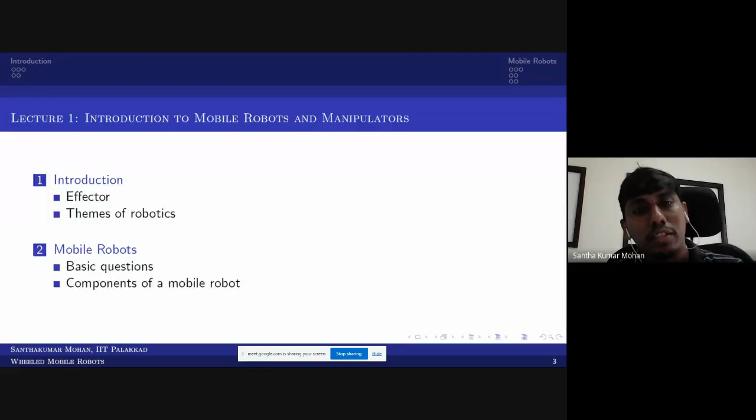What that means is, any robot or robotic device that has an effect on the environment is what I'm going to call an effector. So effector is nothing but robot or robotic device. Now you can look at it: this effect on the environment can cause, you can say, two major different motions.

So the effect on the environment causes motion of the effector itself, and that is called locomotion. For example, take a football. You are standing on top of the football and trying to roll it. What happens? The ball will roll, and if you are able to stay stable, you will also move along with the ball. So this is one case: the effect on the environment causes motion of the effector itself.

Now you are not standing on the ball, but you see the ball in front and your leg is trying to manipulate it. So based on that, you have two different classifications. One is what we cover in this course, the locomotive device: if the effect on the environment causes motion of the effector itself, we call it mobile robot. The other, if the effect causes motion of objects around, is called a manipulating device, or simply manipulator. Since manipulator usually means a mechanical means, and since it is a robot, we call it robotic manipulator.

I hope yesterday my friend Sudhir covered kinematics and dynamics of robotic manipulator, so you would have got more information about that. But I will be talking more about the mobile robot. Just to give a small idea how locomotion happens, imagine you take a wheeled mobile robot.

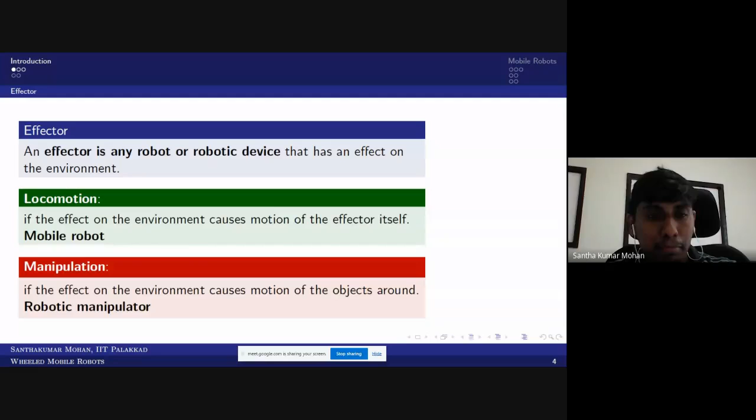One additional case I'm going to cover in the next session is called motion control, or control. What would be the role of control? Several people call the controller also one of the effectors. To a certain extent I agree, but the controller should not be called an effector, because it is actually trying to make sure the effector gives the desired effect on the environment. So the controller is an aiding tool, not an effector. In that sense, the robot itself can be called the effector - the locomotive device and the controller together are included as a single entity called effector. That's the trade-off I want to maintain here.

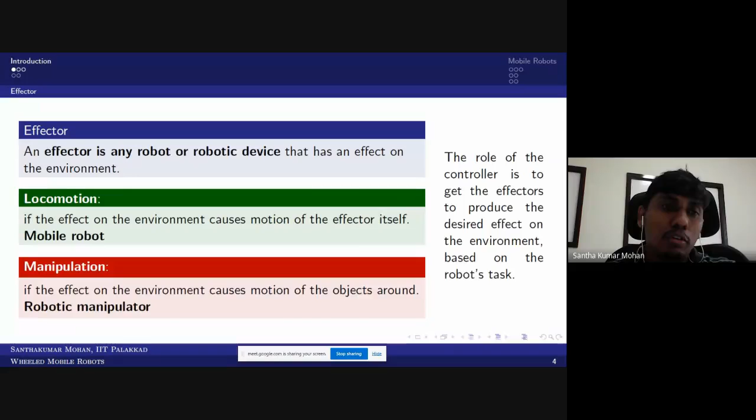Let us go further. You already saw last day what a manipulator is. The manipulator, one side is fixed - it is either a serial manipulator or a parallel manipulator, and definitely one end is fixed. If that end is put on a mobile base, then that is mobile manipulation. But if it's just a manipulator, it's a fixed manipulator. If it's a serial manipulator, the end, or the mobile platform if it's a parallel manipulator, the end effector would have a reachability within a certain constrained way.

So in the sense, the manipulator will work in what you can say a constrained workspace. Because of the constrained workspace, perceiving the world around them need not be necessary. You put a fence, then also a manipulator can work. Further, because most manipulators have joints, those joints easily allow you to estimate the absolute measurement.

For example, you take a rotary joint, you can use it as an encoder, or you can use it as a potentiometer. You can get the absolute measurement of position easily.

Whereas if you come across the other side, which is the contemporary of the manipulator, definitely it is not operating in a constrained workspace. It is definitely unconstrained. To a certain extent, the unconstrained workspace is something like unstructured. What that means, for example, a mobile robot within a room is probably structured. Now imagine the mobile robot you are putting on a field, for example in a war field or forest, which is completely unstructured, right?

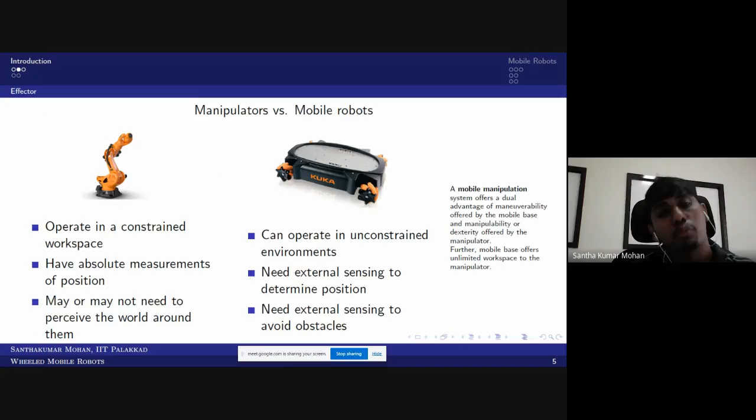In addition to that, the mobile base offers unlimited workspace to the manipulator. In that sense, you have abundant workspace for the manipulator, which is actually one of the critical cases, one of the easiest ways to understand.

Most mobile manipulator systems are actually manual. A very simple example you would have seen on the roadside, the earth movers, specifically the backhoe, or excavators and all. These are actually one of the bigger vehicle manipulator systems, which we call mobile manipulator systems.

But in the current community, the mobile manipulator is actually playing a major role. How it is, that we will see in upcoming slides. So for understanding the mobile manipulator's role, I'm just giving a basic idea.

I already said in the late 60s and early 70s robotics started, or robot system development started. Since then, people are working on broader things. One is actually trying to increase human life, or humanity's aspect. The other side is trying to enhance the machine's capability, indirectly trying to increase the productivity. One is probably profit oriented, the other one is benefit oriented.

So both you can put as benefit oriented, but one is about humanity, where the money is not the concern, you are trying to increase human life. The other side is you need to make optimization and try to make sure that whatever you are implementing is profit oriented, so your resources are used to maximum utilization.

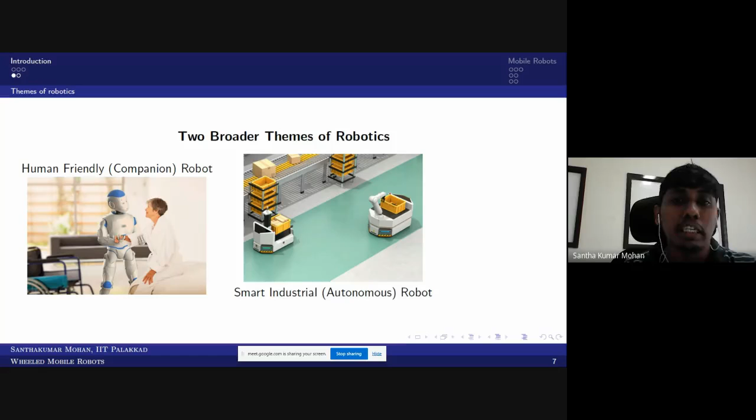So what I can do is actually give a small idea, a very small idea, of why we require kinematics and dynamics. Why most of the mobile robot community restricts to what you call kinematic system, kinematic control, kinematic design, and why they don't go to dynamics when you want dynamics - these are all things I would be addressing.

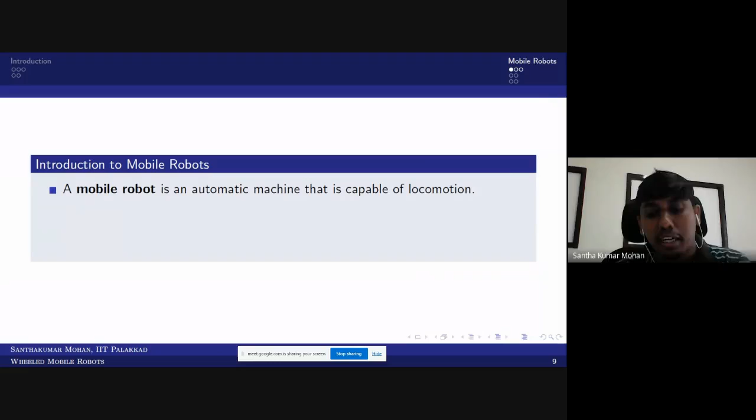The when and where, I think you can go through in a different slide. So right now what we are seeing, we are talking about mobile robot. You all know a mobile robot means it is capable of locomotion. That is what is more important.

In other words, it is the capability to move around. But I'm not specifically mentioning what kind of mobile robot, because a mobile robot can roll, walk, fly, swim, or even anything else. But here I am going to focus on the roll, meaning you are going to have a wheeled mobile robot.

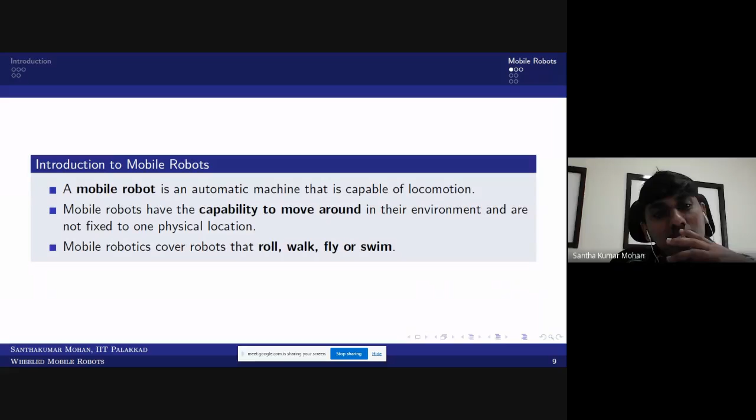I'll give most of the study in a more general sense to the ground-based mobile robot, meaning on a planar case, the general study of kinematics and dynamics. That is what I'm going to restrict to in this particular case. So now you can get an idea of what remains or not.

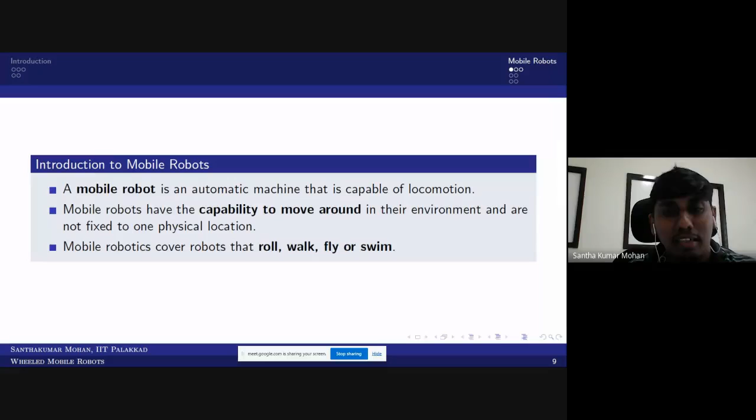With that, we will talk about other aspects. So for understanding this, what are the components we need to know, and why that component needs to be there in a mobile robot. For that, I'm giving one simple example.

Okay, so assume that I'm a Korean, don't immediately get a counter attack. So imagine I'm a Korean working in Seoul National University, and I have a partner working in IIT Madras, and we have certain combined or collective talks. So the IIT Madras professor decided to organize one workshop, and he is inviting me. He called me and said, hey Santhakumar, you have to come to IIT Madras. Your flight ticket, everything I will book, and I have already booked the guest house. You come down to Chennai airport, there would be one driver who picks you up and takes you to the guest house. So that's the case, on such and such a day, and that's the way.

Still, I'm a kind of conservative guy. I just went through something like, where is IIT Madras, from where can I go - for example, airport to IIT Madras, what are the landmarks. I'm just, as a conservative guy, getting to know, because I'm not good enough to talk in Tamil or Hindi or English. You imagine, because I am a Korean, I can read, but I cannot fluently talk to everyone. But I can handle the session, though I may not be able to talk in a local way. That is the limitation.

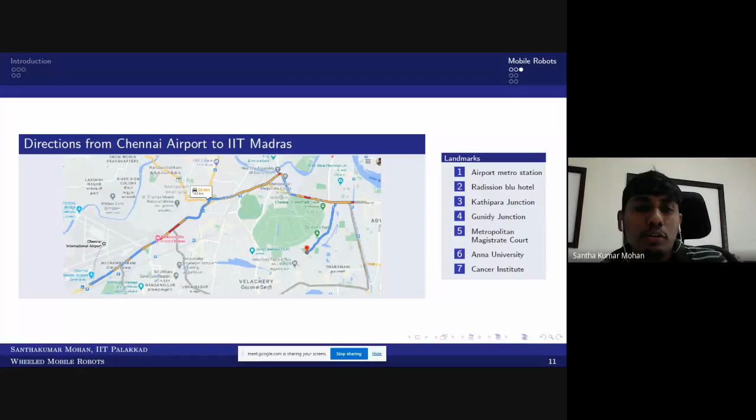So you can see what I'm trying to do - I'm trying to make several questions and trying to answer them. But can a robot do that? No, right? So the robot has to make the questions: where am I going, and how do I get there.

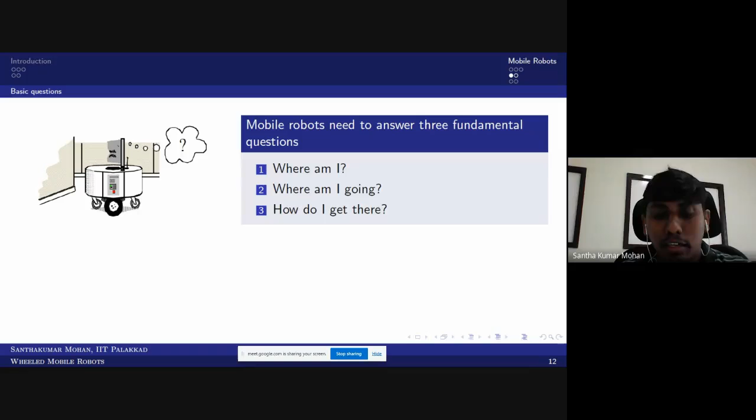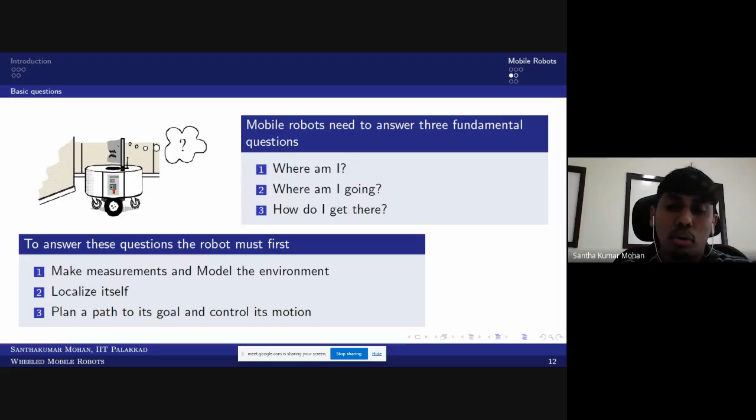These questions are definitely put on the mobile robot community, because after all it's a machine. You are giving some kind of prefixed controller or intelligence to it. So obviously these questions need to be answered. How will you answer? Definitely you have to make measurements. Making measurements will give you the model, understand the environment, where you are, then localize yourself, then plan the path towards the goal and control its motion, and finally you achieve everything.

So if you look at all this, robotics itself will have four sub-components. What are those components? You need to have a mechanical body. That mechanical body is supposed to have an actuation system. So that is one of the pillars.

Then you need to understand what is around you and where you are - all those things. So you need to have some kind of sensing. That sensing alone is not enough. You need to perceive that into an informative form. That information you need to process and use in some useful form. That is what we call navigation.

Now that navigation is actually very broad. That navigation would be associated with a constraint, associated with something higher level, which is what you call guidance. So guidance is something on a mission level and constraint level - all your views and the navigation will give only a certain direction, but this direction would be executed at a lower level.

For example, take a mobile robot. I say take a straight line, just imagine, and move forward 10 meters. Who would do that? The motors, right? So we are coming back to the lower level - motion control and task execution happening again at the device level. So sensing, perception and navigation - simply guidance and navigation - these two blocks happen on top of the device, which is the element layer, a higher layer, while the lower level is the physical structure and execution part.

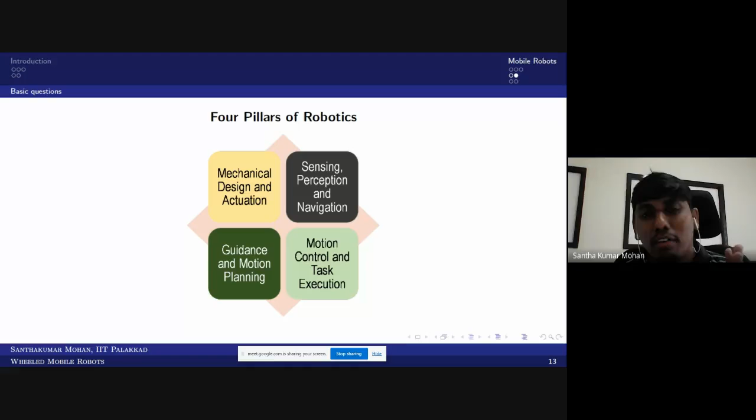Unfortunately, I am not going to cover the entire thing in these particular two sessions. What I am trying to cover is something related to mechanical design, and I'll be talking close to motion control — that's what I'm trying to cover in this whole session. So these scenarios are skipped; I'll come back straight to the lecture. Okay, what you need to have.

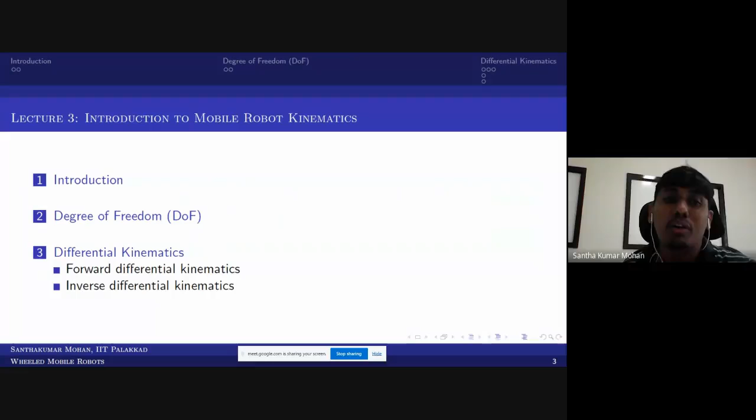So this particular handout will be talking about mobile robot kinematics. You would have already come across robot kinematics, right? You've already studied that. So it is still general physics, right?

What general physics? Kinematics means study of motion without considering the cause of motion — which we call without regard to forces or moments, the effects which caused the motion, right? This is what you already studied in the last two sessions.

In addition to that, you would have studied one more thing. What's that? Robot kinematics is nothing but kinematics, and in addition it is a mapping, right? That's what you would have studied in the last two sessions. What is that mapping? You have two different spaces, or even n number of spaces, and you are trying to map one space to another in a certain domain.

For example, I think Professor Sudhir would have talked about task space and joint space, right, where you have two sets of variables. That set of variables I call a space. So now there is a task space and a configuration or joint space. Now you need to map the space in the position domain.

What you call that is a geometrical model. If you know the joint space and you find the task space, that is what you call forward kinematics. Similarly, if you know the task space and you find the joint space, that is what you call inverse kinematics.

The same way, you go one step further — what does that mean? You go into the velocity domain. Earlier you did a simple geometrical model where everything was in the positional domain. Now you've gone one step further into velocity. So now task space velocity — we call it end effector velocity — and joint space velocities, you are trying to map.

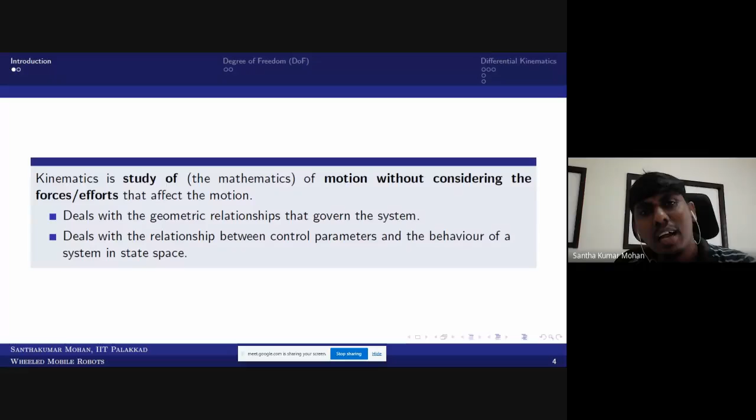Okay, that is what we are trying to see. And similarly, in the next slide, we will talk about why we need a mathematical model — you all know.

So why we need to understand the system, we need to design the mechanical system, we need to design the controller, we need to design the navigation, we need to design the guidance. In certain cases we need to estimate or predict certain parameters. These all are a very general aspect for mathematical modeling, and I'm extending that to a robotic system also.

So now when you do the mathematical model, or when you want to understand the overall behavior of the system, what you have to see is that robot is a motion making system. So you want to understand how the motion happens. Motion means you need to know what is the positional information, how it is oriented in the given space. These all you need to know, and now you need to describe this.

In order to describe, you can actually describe in a number of ways. For example, I can describe this bottle probably 1,000 ways or even more. But I want to describe it in such a way that I can uniquely identify it. Then you bring it down to a minimum number.

Very simple example. Suppose a former faculty of IIT Indore is visiting your institute, but you forget about me, you don't remember my name, and you don't even remember my department. So what you are trying to do is give some kind of description of the one who came from IIT Indore, to make sure the listener understands whom you are talking about.

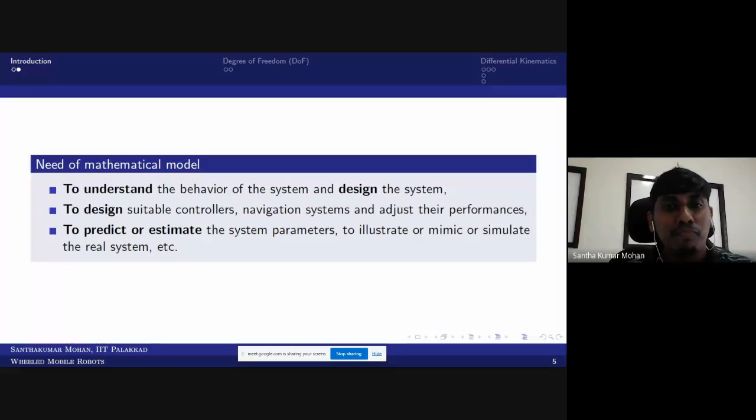You say that he visited IISc. Then it is further narrowed down, he could understand to whom you are referring. Then he says, oh, Santhakumar, you are talking about Santhakumar! I know him, he's a friend of mine. So now you are giving a minimum number of descriptions so that he can understand - so this is one thing.

And second thing is, now you want to describe in a general way about my physique. You say you are talking about me - he is short in height, dark in color, probably long hair, or he's talkative, like that. You are telling some description, but this description is not common to everyone. Dark in color may not apply to African countries, short in height may not apply to Mongolian countries, long hair may not apply to certain countries like France or Italy, and similarly talkative is not at all a qualitative measure.

So now if you are saying this, you are bringing two things. One is you are trying to make sure there's a minimum number of variables to describe the system - that is what we call degree of freedom. But even then you are bringing in some reference, so the reference is also important.

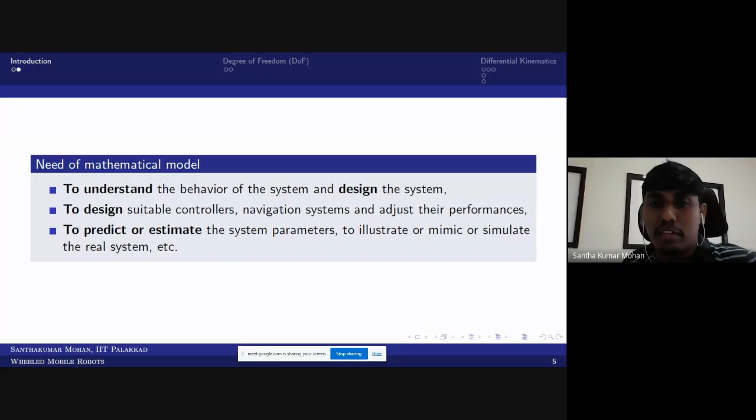So in this particular session, we are going to take a very common reference system, which we call the Cartesian coordinate system, which is three mutually perpendicular axes. That is what we consider - since Descartes has given it, we call it Cartesian coordinate system. So now you know degree of freedom means the minimum number of variables, or number of independent variables, to describe the system in a unique sense.

Although I have not explicitly given it, that is the case. So, land-based wheeled mobile robot or water surface vehicle requires only 3, because that is in a plane. What maximum can it do? It can do 2 translations and 1 orientation.

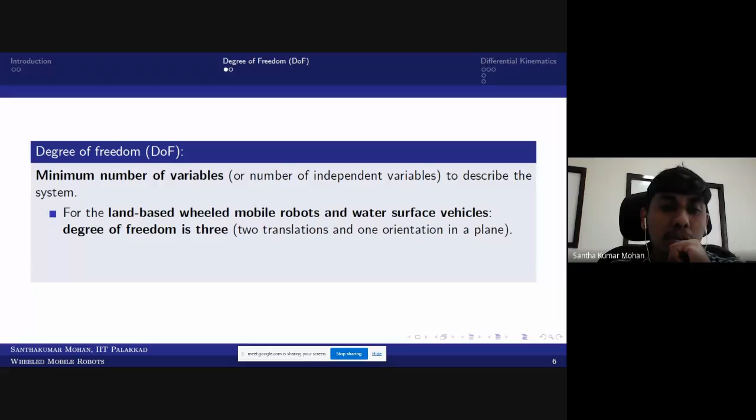If the vehicle is in 3-dimensional space, such as space or aerial, you can see the degree of freedom is 6, right?

Now, you would have studied degree of freedom in a manipulator as the number of controllable axes, but that is not right. What that means is actually manipulability. Degree of manipulability is what you have said, the number of controllable axes. The degree of freedom for the robot, if it is planar, is 3.

If it is in space, it is 6. Your number of controllable inputs can be 4, 5, 6, 7, even 10 — even a high number. But when you want to describe the system, the minimum number required is 6 if it is in 3-dimensional space.

Please make it clear, because most textbooks say robotic manipulator degree of freedom means number of axes. It is not true. If that is the case, the parallel manipulator number of axes would be more. Then you will say number of controllable inputs — that is also not true. This all talks about degree of manipulability, not degree of freedom.

Degree of freedom is the minimum number of variables needed to describe the system. For example, even take a planar case, I assume it has probably 10 R joints. What is the end effector description with respect to the ground or inertial frame? You need only 3 variables to describe it, right?

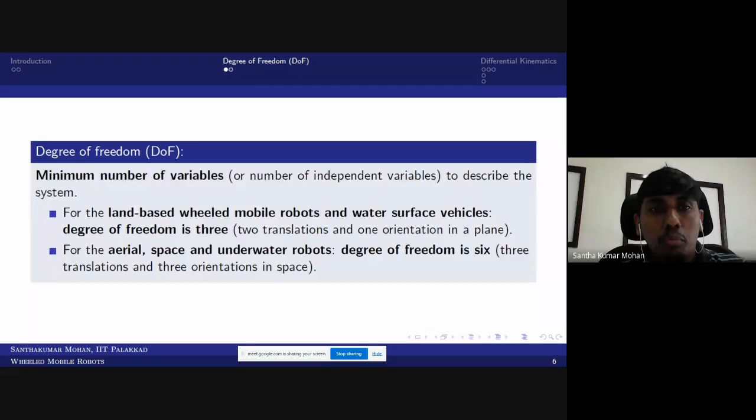So imagine, if that is the case, this can have translation in x-axis, y-axis, and z-axis rotation, right? So now it is having 3 degrees. You all agree?

Now I want to describe it — can I do that? Because this has multiple points, I cannot even fix a frame. So what I can do is fix something somewhere as the frame. That is what I need to do. For even describing this, I need to have some reference. That reference I am bringing onto the blackboard or whiteboard itself.

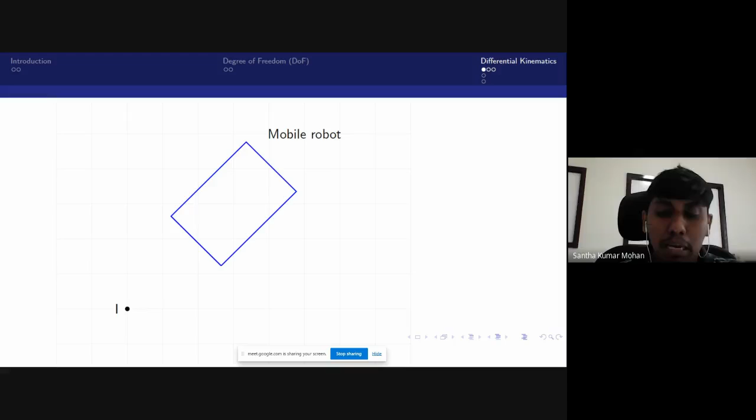One of the corners I am keeping, and I call it I. As I already said, I am going to use a Cartesian coordinate system. So this is the Cartesian coordinate system. Since it is in a plane, I can restrict to x, y — the z would be coming out of the screen. So in that sense, this is I.

Now even then I cannot define this mobile robot as a single entity, because there are n number of points associated with the blue box. So what I have to do is make it something — the easiest is to take the centroid. So I fix another frame called the body frame. Now you can see that B is the body-fixed frame, which is a mobile frame, and this I is the earth-fixed frame. Anything fixed, we call it inertial, right?

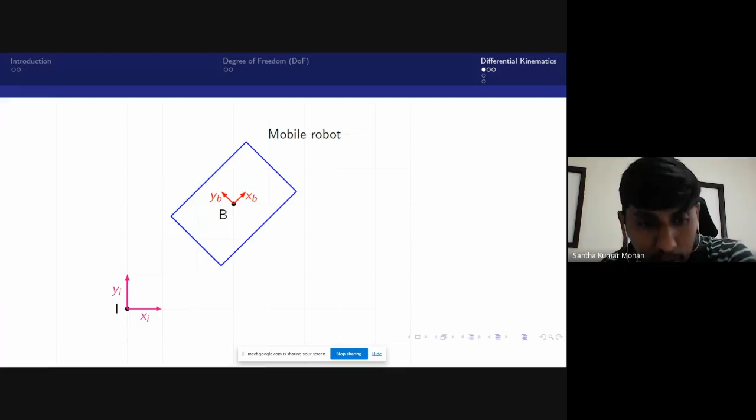So this is inertial frame and this is actually the body moving frame. Now what you want is the information, what is the orientation, or the angle difference between xb to xi, and the point I and b in x and y. These are the things you wanted, right? So these are the three variables you want to describe. This is what you call the generalized coordinate x, y, psi.

But unfortunately, the body B, or the mobile robot connected with wheels or connected with some input device, that input is actually happening here. Due to that, the body will get an instantaneous velocity at each instant frame. What that means is instantaneously it would be having a longitudinal velocity, lateral velocity, and angular velocity with respect to the body frame. Again, I'm saying it's instantaneous. So when you freeze the frame, you can see that there is an instantaneous velocity that exists.

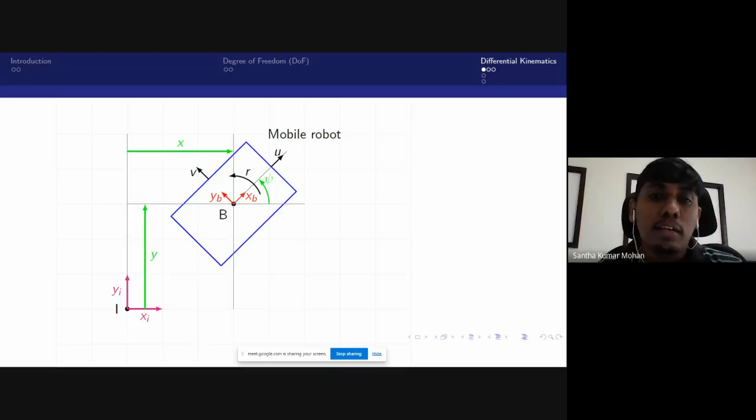So now you already studied what is robot kinematics. It is mapping between two spaces. So here, what are the spaces? You have x, y, psi, that is with respect to inertial frame, I call that set of variables the earth fixed space. Whereas u, v, r is another set of variables, in fact it is one dimensional extra because it is a derivative, that would be in the body fixed frame.

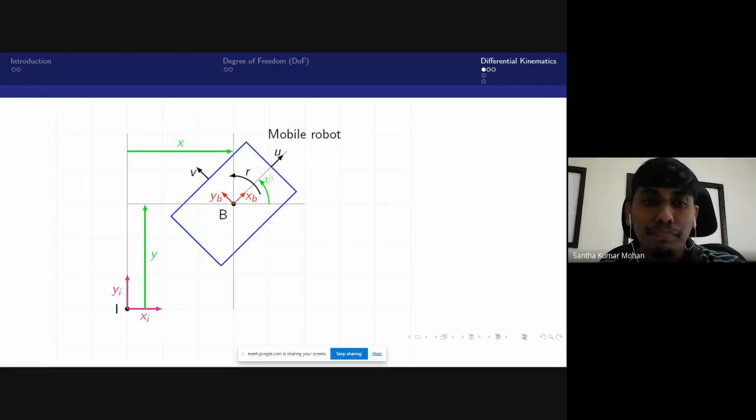Now you need to map these two. So what you can do the mapping? Either you bring down u, v, r into a positional domain, or integrate that, or you can elevate x, y, psi as the time derivative of the generalized coordinate. So what is the easiest one? The easiest one is bringing up x, y, psi as x dot, y dot, and psi dot.

Why is it so? Because u, v, r is the instantaneous velocity. You cannot make instantaneous position because the position would be realized that B is actually the same, right? You will always see 0, 0, 0. That is nothing going to come. So in that sense, what you can do is elevate the x, y, psi as x dot, y dot, psi dot.

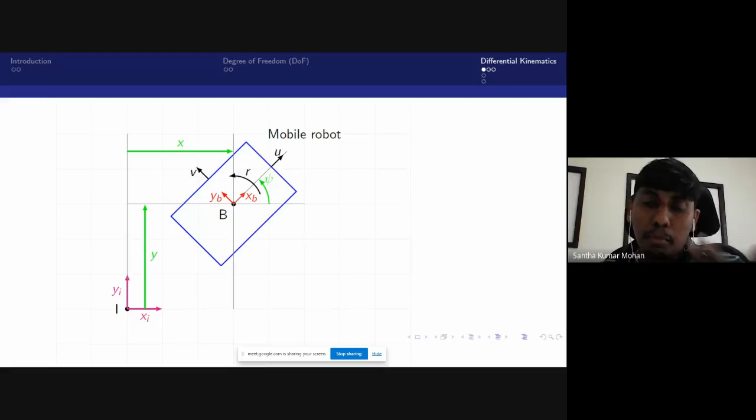So now, if I want to elevate x dot, I need to see what would be equivalent, because the body frame and the inertial frame would be having an equivalent, right? So u, v, r would be consisting of, or component that will bring some velocity to x, y, psi. So what you can do is take the individual velocity u, v, r and project it on the I-frame. I see what is the resultant vector on x-axis, y-axis, that would be equivalent to x dot, y dot. And what would be the angular velocity projection on z-axis, that would be the resultant velocity in z-axis.

In this case, psi dot is straight away r. Why? Because the zi and zb are actually parallel. So what you have to do is project u and v to the I-frame. I am taking u and projecting in I-frame, so on the x-axis it will come u cos psi, and on the y-axis it will come u sin psi. Similarly, I am taking the v vector and projecting into yi, that would be v cos psi, and projecting into xi, that would be v sin psi.

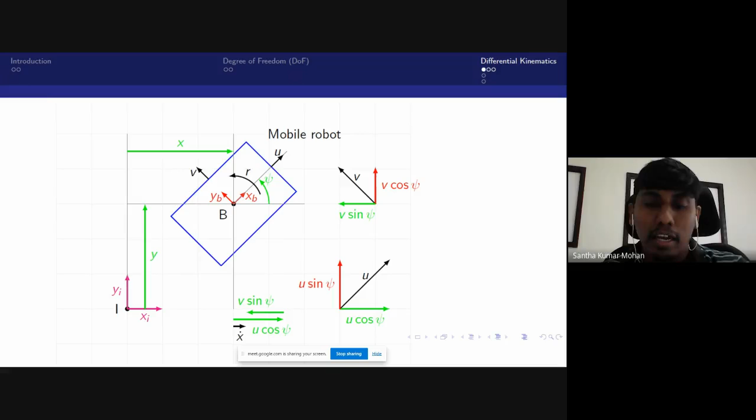Now what would be x dot? X dot would be the vector addition of u cos psi and v sin psi, that is equivalent to x dot. Similarly, the vector addition of u sin psi and v cos psi would be y dot, right? So now you got it, you already know psi dot is r, and you got x dot and y dot. So you can rewrite this into straightforward relations: x dot is u cos psi minus v sin psi, y dot is u sin psi plus v cos psi, and psi dot is r.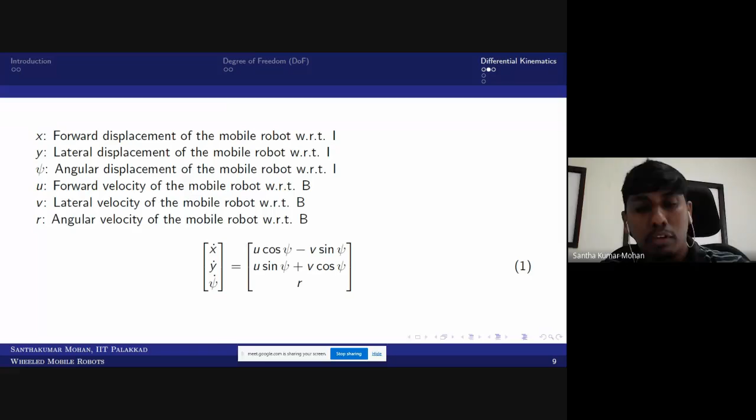So now you got the relation, but the relation is in a differential domain, in the sense it is in a velocity domain. This is equivalent to forward differential kinematics, but that is not the interest here. What the interest here is, can I make it two different spaces explicitly visible? So x dot, y dot, psi dot is already explicitly visible.

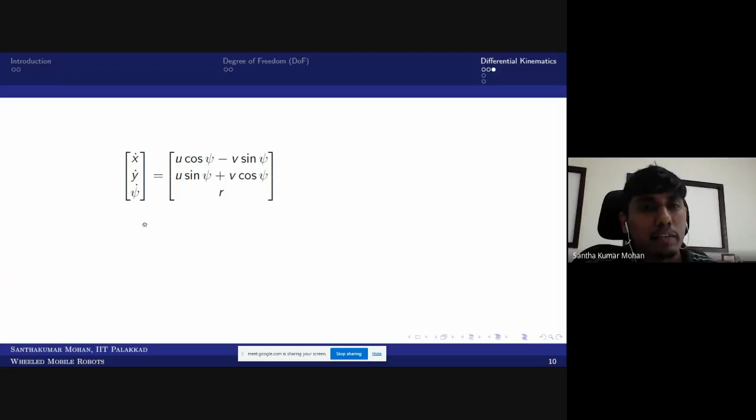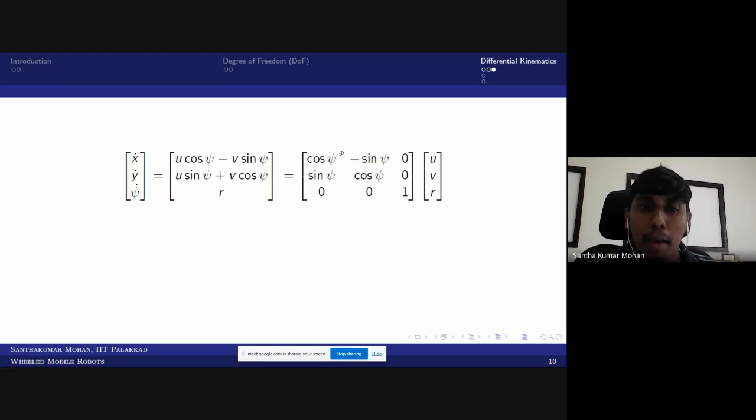Can I make it u, v, r explicit? Yes, I can do. So if I do it, this is the mapping matrix. It is mapping the body fixed velocity command, we call it velocity input velocity command. This is actually like time derivative of generalized coordinate. It is mapping the input commands to the generalized velocity coordinate. So this mapping matrix happening in a velocity domain, this is what we call Jacobian matrix.

It looked like a rotation matrix, it is not. Please make it sure this is not the rotation matrix. It's a Jacobian matrix. So this is what we explicitly got.

So this equation is what we call kinematic model of a land-based mobile robot. What relationship is it giving? The relationship giving as velocity input command, we call body fixed instantaneous velocity, gives a relationship between the derivative of generalized coordinate. So here you can see this is a function of psi, you have to make it clear.

So now J is a Jacobian matrix. You know what Jacobian matrix is. And fortunately, this is actually a simple orthogonal matrix, so the J inverse is actually simply J transpose.

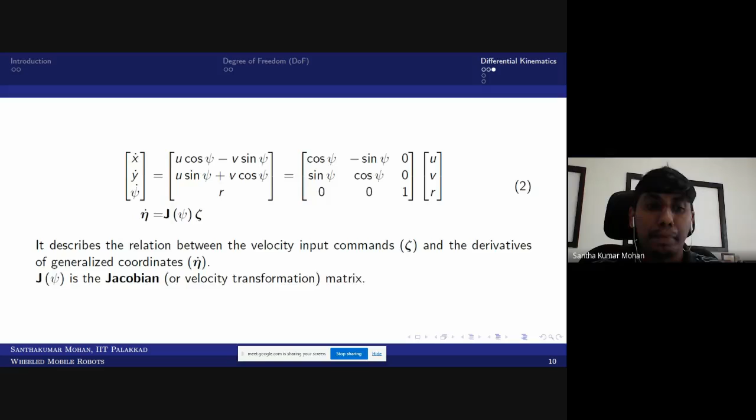But if you take it in a very serious way, for a given velocity command, indirectly you take a vehicle, connect the wheel and connect the motor speed. So what will you get? You will get the velocity command. In the sense, you take the vehicle and give the velocity input command, and you are trying to see how the vehicle moves.

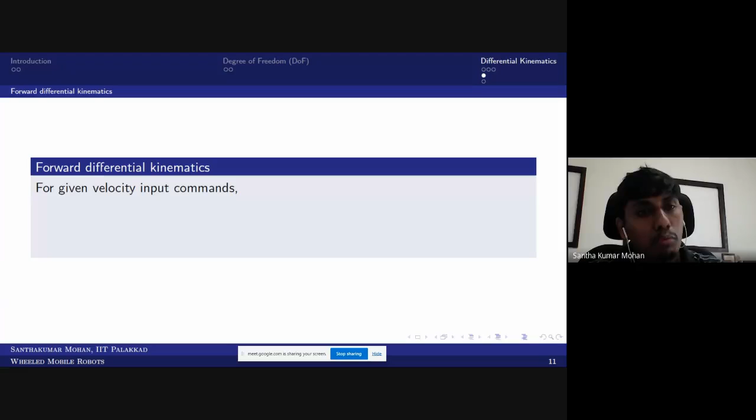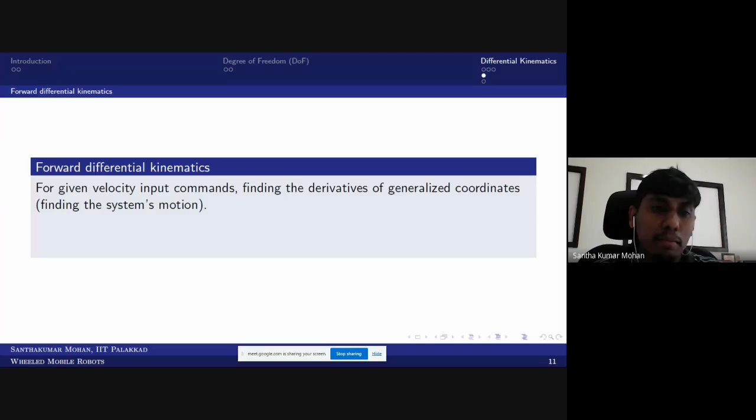So this is what we call forward differential kinematics: finding the derivative, taking the integral, and then seeing where the position goes. This is what we call simulating the system, or analyzing the system in the real world. So this is what we call, at the velocity level, simulating or analyzing.

Similarly, you take the other side where the inverse is used, in the sense you are looking at something in a desired manner. So this is your position trajectory with time. Trajectory means time dependent, right? So you can see how it goes, then you are trying to find out what velocity, if I give it to the vehicle body, I can attain. Indirectly, you are trying to control the system.

But it is not directly what you can call control; to a certain extent you can call it that, because it's an open loop control, or you call it feed forward control, at the velocity level.

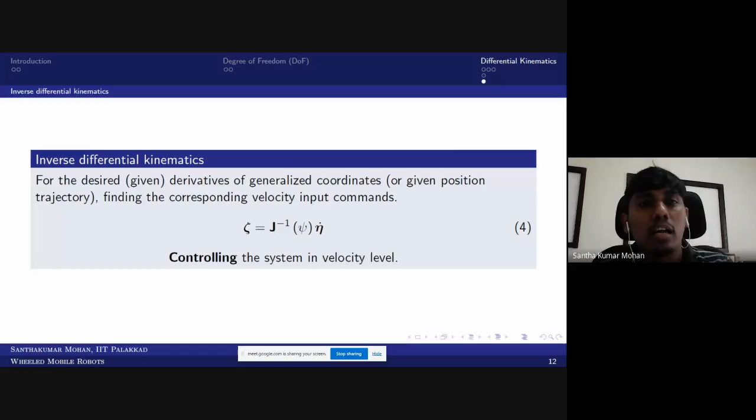So now this is what you call the kinematic system, but this is generalized, right? You did not bring in anything about your wheel or thruster or anything else so far. So for understanding that, we will take it to the next slide, which covers one important aspect.

So we will bring in the degree of maneuverability. What does that mean? The number of controllable inputs. For that, we are talking about wheeled mobile robots, so you have to talk about what kind of wheels you have. Based on the wheel, your degree of maneuverability will change. We have already seen all this, talking about degree of maneuverability.

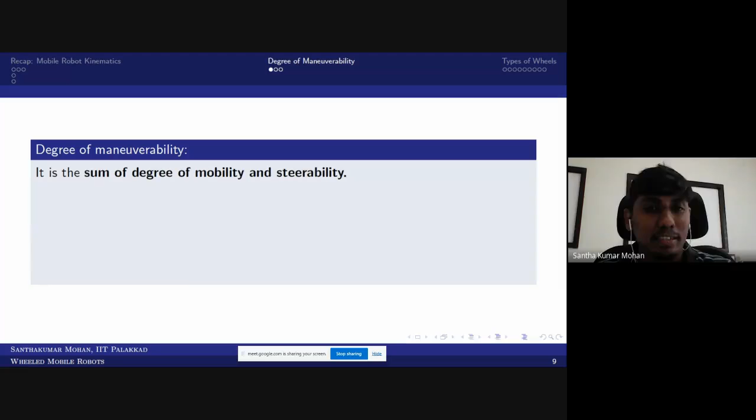The degree of maneuverability, very explicitly, is the number of controllable inputs, but the theoretical definition is the sum of degree of mobility and steerability. What that means: your body fixed velocity is directly controllable with certain input, that you call degree of mobility, whereas if it's indirectly controllable—for example, you have a vertical axis that is moving your velocity component—then you call that steerability.

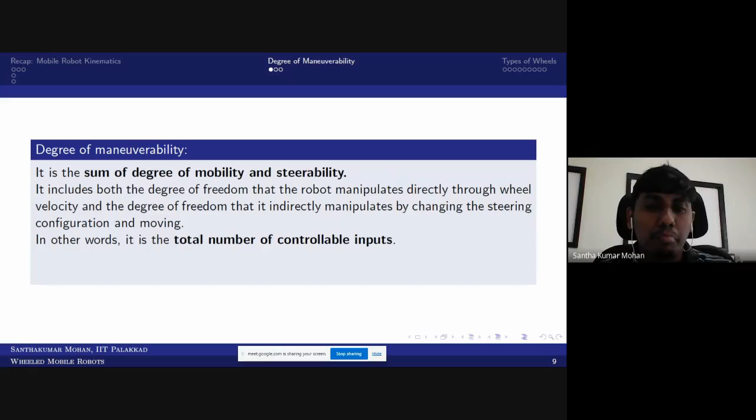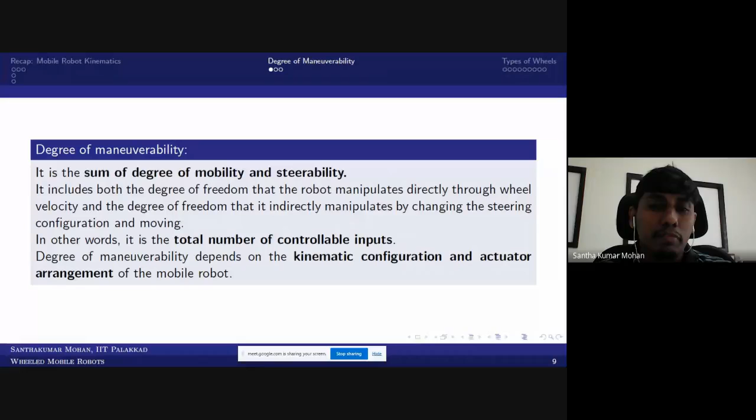So now, the sum of degree of mobility and steerability is what you call degree of maneuverability, which we already saw is simply the number of controllable inputs. This number of controllable inputs is actually dependent on the kinematic configuration and actuator arrangement. So now the degree of maneuverability and degree of freedom, there is some matching, which we will see here.

This is what we are trying to understand in the next slide. So for understanding that, first we will talk about the types of wheel. Broadly we'll classify the wheel into two broad categories: one is solid wheel, the other is inflated wheel. Inflated wheel means air filled or pneumatic filled, or nitrogen filled, or probably something like liquid fill. So many combinations come under inflated.

The inflated wheel, why we are using it - there are several advantages. One important advantage is that it will absorb the shock and give some flexibility to the suspension system. But now let's talk about the solid wheel.

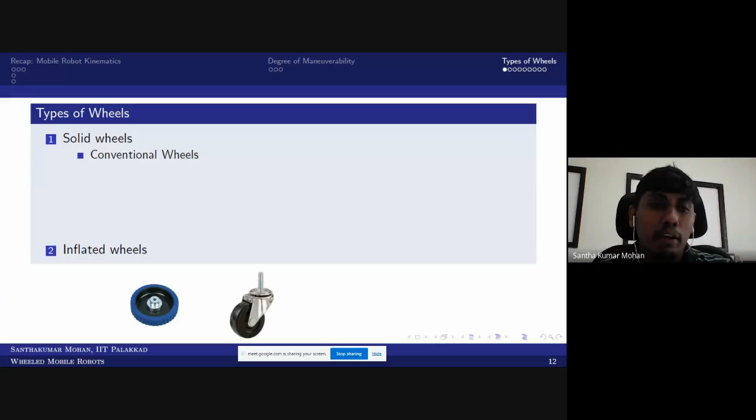The solid wheel has two types: one is conventional wheel, the other is non-conventional. Even in the conventional wheel, we have two sub-classifications: one is fixed wheel, the other is rotatable or steerable wheel, simply called caster wheel or swivel caster.

On the other side, non-conventional wheel has a passive roller fixed. Based on the location of the passive roller, you call it omnidirectional wheel or mecanum wheel.

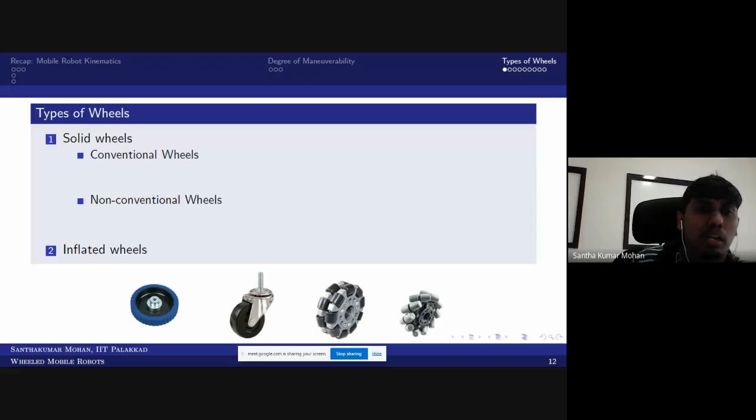Now we'll come back to the conventional wheel. Why is it called conventional wheel? The conventional wheel has pure roll, meaning lateral slip is zero, so lateral resistance is theoretically infinite. For example, if you take a car and try to push it in a lateral direction, it is almost impossible, because there is infinite resistance on the fixed wheel. So you don't have lateral slip - that's what we call a conventional wheel.

But if you want to intentionally do lateral slip, then you have a passive roller. This is what we call Swedish wheel, because the Swedish company brought it directly from Sweden - that's why it is called Swedish wheel. The Swedish wheel is further classified into omnidirectional wheel and mecanum wheel. The mecanum wheel usually has a 45-degree angle inclination for its passive rollers.

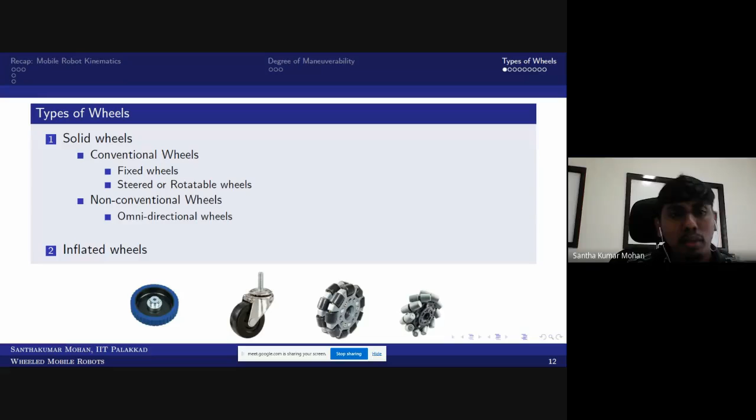So these are the types of wheel. Based on the type of wheel, we can make the marking. You can see these are fixed wheels - if it is green it is non-powered, and red is powered. This is non-powered, and this is rotatable wheel, it's a caster. If it is simply a spherical wheel, that is also considered a caster. This is omni wheel, this is mecanum wheel.

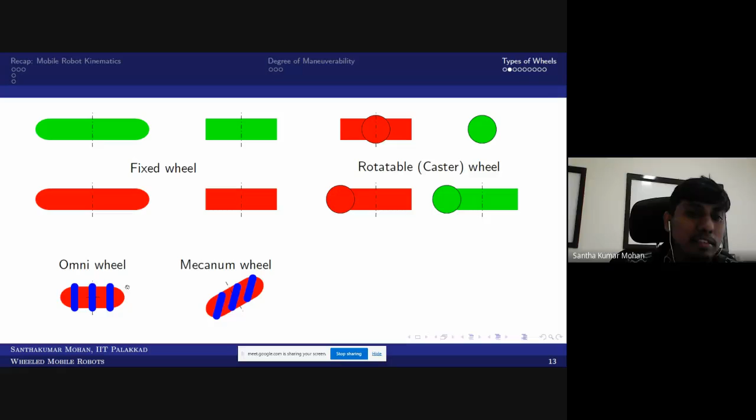Now you can go across to understand what is the degree of maneuverability here. You can see this is powered, giving degree of mobility 1 and degree of mobility 2, and there is no steerable wheel, powered steerable. So degree of mobility is 2, degree of steerability is 0, and degree of maneuverability is 2.

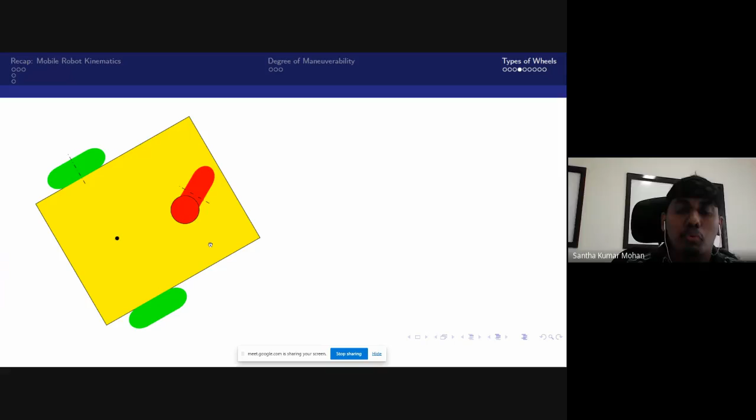Similarly, here you can see it's powered, degree of mobility is 1 and degree of steerability is 1, so 1 plus 1 equals 2. Similarly here you can see it is all 3.

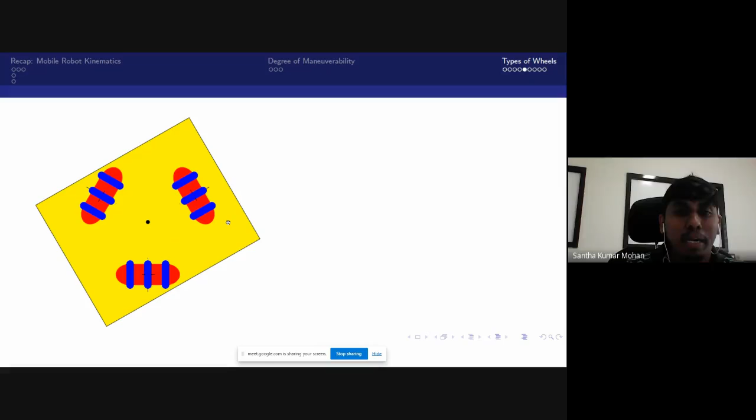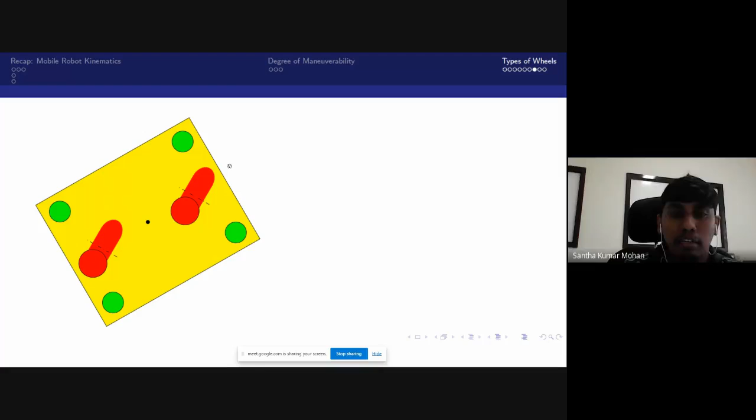The passive roller is there, but there is no steerability. So here 3 mobility is there but no steerability. Similarly here there are 4 mobility, but there is no steerability. Here you can see 2 steerability and 2 mobility, which is again 4. And these are other ways of convention.

So with that, you now know what is degree of freedom, what is kinematic model, and what is degree of maneuverability. So now you've reached an itching point - how can I actually find the matrix W?

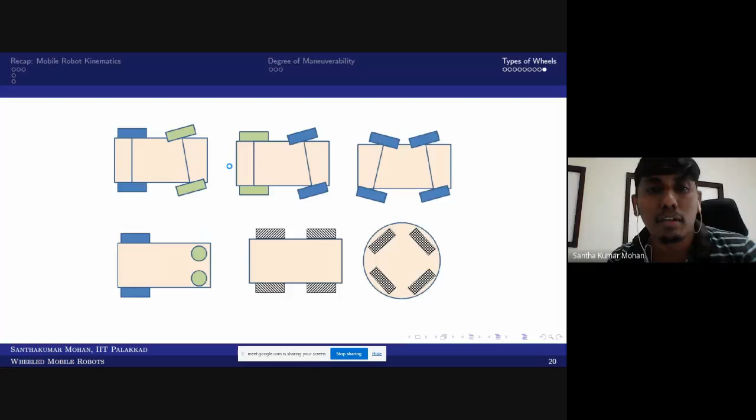For that, there are several methods. I'll be proposing one of the methods which is easiest. It is not like you need to know only this method, but this method is applicable to any system, any wheel configuration. Whereas if you take the instantaneous center method, it is very difficult to find the instantaneous center for further configurations, for example mecanum wheel or omnidirectional, or independent steerable wheel. It is very, very difficult. Whereas this particular generalized wheel model is very easy.

So what we will do, I hope I can actually cover it. Is there time? You have time, right? Because it requires at least 20 minutes. If you have time, then we can see it. Otherwise, we can continue into the next session.

Am I audible? Because it's pin drop silence. Yes sir, yes sir, okay, audible. Okay, then I will continue here because I think your break is 10:15 or 10:30. It's 10:30. Okay, then I will attempt this.

So we are taking this generalized wheel model. For that, I'm taking a very complex wheel configuration where there are 4 mecanum wheels. The mecanum wheel, I already said it is supposed to be 45 degrees, but it looks like not 45 degrees. So what you can see is that here there are 4 wheels which have a passive roller. I need to derive the W matrix for this whole configuration.

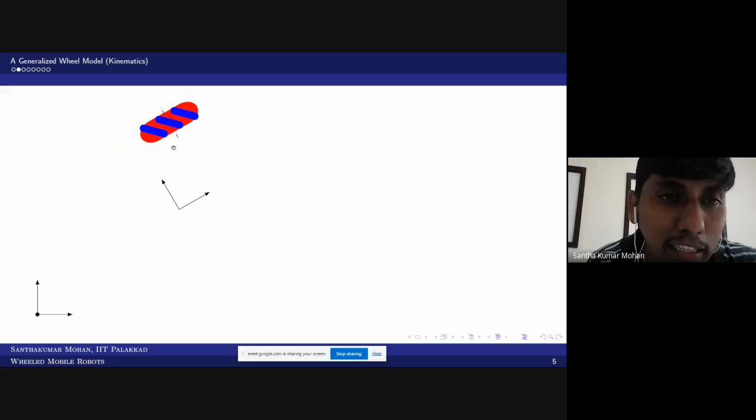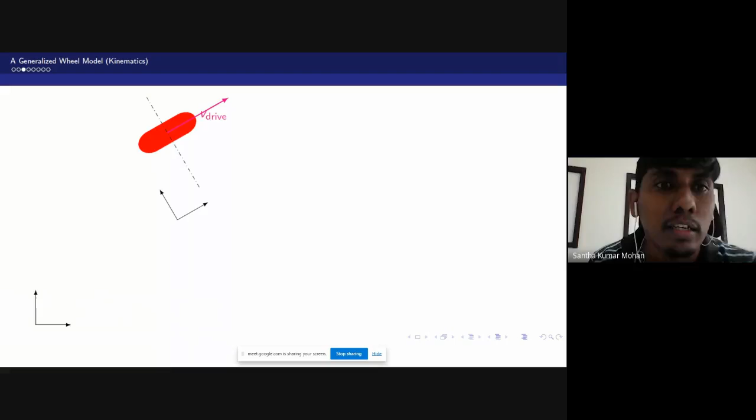So now this wheel, if there is no roller, what would it generate as a drive velocity, which would be a tangential velocity. We assume there is no lateral slip, it is pure rolling. Then this would be having a V drive, that would be equivalent to R omega. Here R would be the radius and omega is the angular velocity. Since I used omega as the angular velocity of the overall vehicle with respect to body frame, I'm taking A as the radius. So V drive would be A omega.

So now I'm introducing the passive roller. Assume that the passive roller is rotating with beta dot as the angular velocity. What would be the V slide? The V slide can slide this direction or that direction, but since it's attached on the bottom of the wheel, it would try to slip in the other direction. For example, you take a duster and put a chalk, a proper cylinder roller, and you just try to push it. What happens? The duster will not go straight. Because of the passive roller, it will go an inclined way based on the direction you kept it. So similarly here, you have a slide velocity.

So now if you look at an individual wheel with a passive roller, there would be 2 velocities: one is V drive, the other is V slide. But one can understand the V slide is not a direct velocity because it is not given from anyone. It is a passive velocity generated due to V drive. If there is no V drive, there is no passive velocity. If the vehicle is not moving at all, there is no V slide at all. So in that case, I can get a relation between V slide and V drive itself. That is what my motive here is.

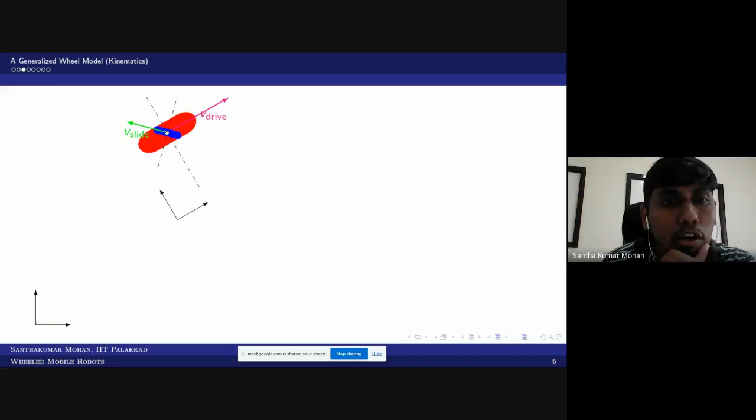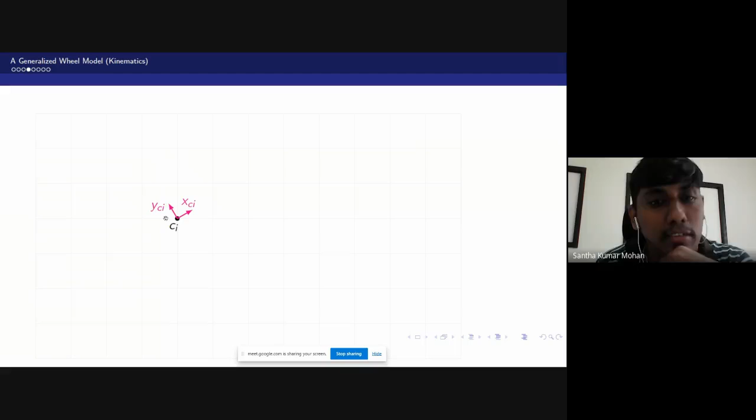So for that, what I'm trying to take is this point, the centroid of the wheel, which I'm calling C, and this is the ith wheel, I'm calling Ci. Now I'm using a Cartesian coordinate system, so I'm bringing xci and yci as the axes. Now along xci, what I have is V drive, that would be equivalent to omega i and ai. Now I'm writing V slide, that would be some phi angle.

So that would be actually like having beta dot as the angular velocity of the passive roller, and rho I is the radius of the passive roller. So this is what the velocity is.

Now I want to relate this beta dot rho I in terms of omega ai so that I can make it, but I cannot do that directly, right? What I can do, I can see xci dot and yci dot. What is yci dot? Yci dot would be having this component on the y direction. What is xci dot? The vector addition of this component and this component on the x-axis, right? So that is what I'm trying to do.

So for that, I'm bringing phi I, positive rotation. Here actually like zi is coming outward. I'm taking the angle between yci to the V slide, or in the other way around, you can take the roller axis with respect to xci. So I'll just show you here. This is the roller axis, right? So roller axis to the xci, or you can see the yci to the V slide. Both are same, right? So that is what we are actually taking as phi I.

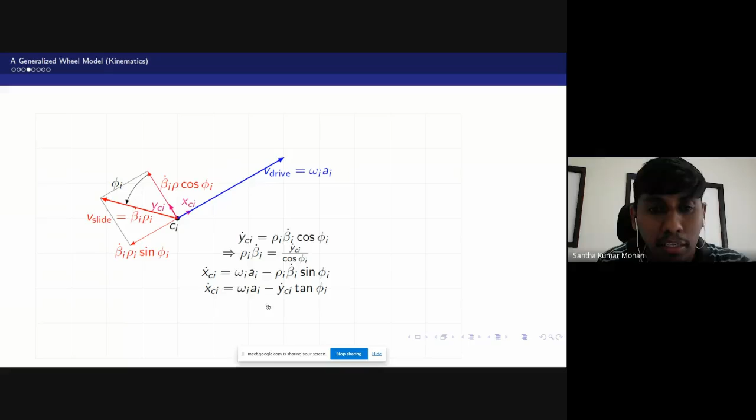So what I will get, xci dot and yci dot and omega ai would be in single form. So I rewrite and I write everything in omega I aspect. So what I will get, one relation. So what I achieved, one of the simplest way, I achieved the xci dot and yci dot if I know, and phi I is actually based on the configuration, I can find omega I.

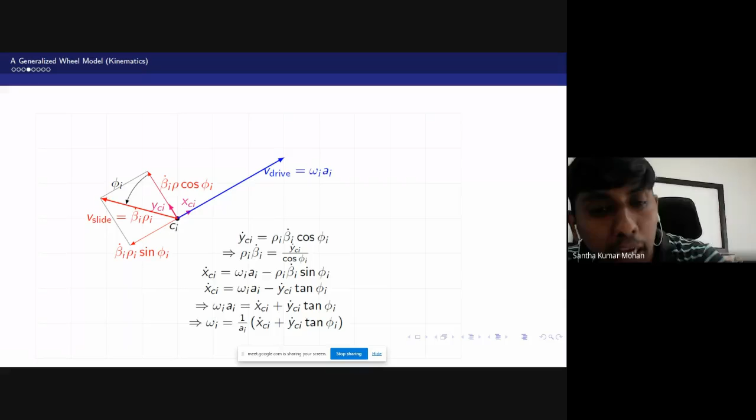So similarly, I can find omega I where I equal 1 to 4 in this case. I'll get a relation, right? But can I actually get xci dot and yci dot in terms of U V R? Yes, I can do. How? That we will see here. This relation I got it from here.

I'm interested to find the relation between xci dot and yci dot in terms of U V R. For that, what I need to bring? So I need to bring the body. So the body is actually the overall vehicle. So the CI is part of the body. You all agree, right? Because the wheel cannot go separate, right? It is attached with the body.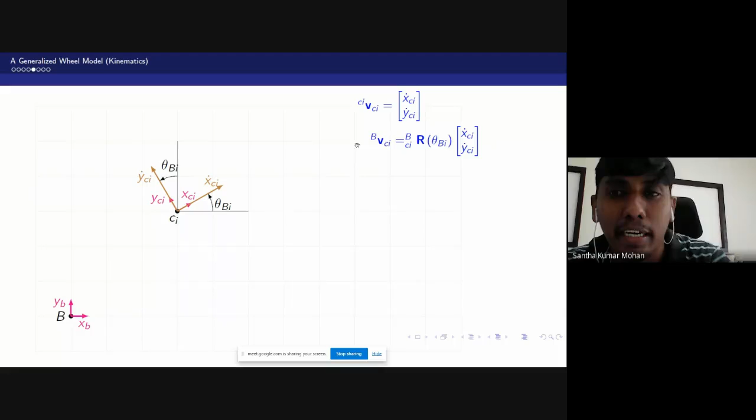So in that case, B and C are inherent in a single body, but the B is having an instantaneous velocity U V R, right? So that we have to actually get it. Before that, I'm writing XB and XCI are having an angle difference that I'm calling as theta BI. So based on that, what I can write, the VCI with respect to B frame, I can write, right? So that is one step.

The second step, what I can do, the velocity component along XB, I can write. That would be XCI dot cos theta BI. Indirectly, I'm making it a projection. XCI dot, I'm projecting into B frame. YCI dot, I'm projecting into B frame. And I'm seeing what is along with XB, what is along with YB. That is what I'm writing it.

So if I'm writing it, what happened? This would give one relation, right? This is what is happening here. So this relation, I got it, right?

Further, what I'm bringing it to U V R, and based on that, I'm transferring that into CI point. So what I can do, I can see that this is distance apart and angle apart. So I'm getting this. So because it is a single body, whatever longitudinal velocity that would be coming, in addition to that, this is actually R. So what you will get is a tangential velocity which is connected and perpendicular to that. That would have two components, which I can write as X direction and Y direction, right?

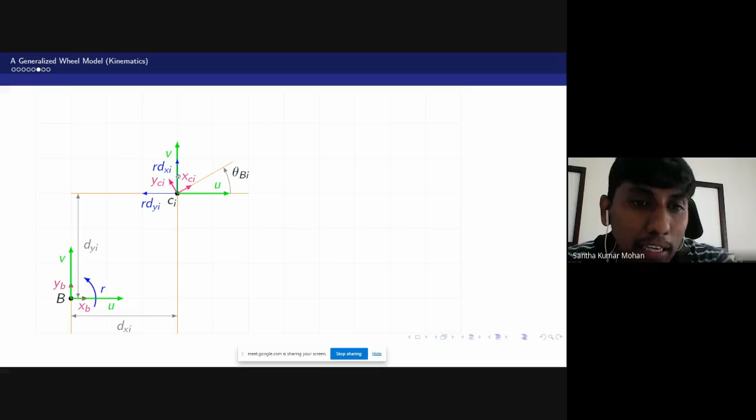So now if you look at it, at CI point, you have written the XCI dot and YCI dot, one relation, which you have written here, right? Similarly, I can write the same thing in terms of U V R, right?

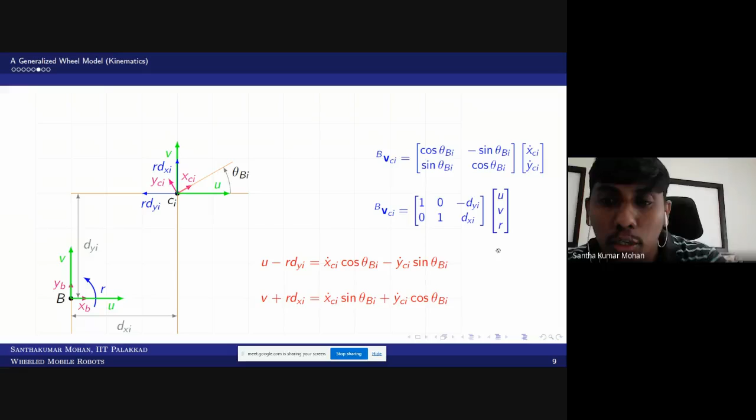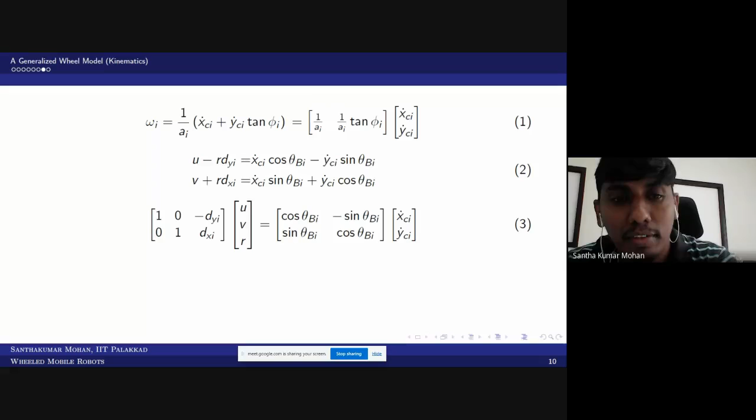So this is supposed to be equal, right? You got one relation between UVR to XCI dot and YCI dot. So this is what you got. Now these two are equal, so now you have clarity: you already know omega I in terms of XCI dot and YCI dot. And now this XCI dot YCI dot I replace with UVR. So now omega I is in terms of UVR.

Now for n number of wheels, you add it and rewrite that. So further, to make it in an inertial frame, you bring x dot, y dot and psi dot in terms of UVR. Now you rephrase this UVR in terms of x dot, y dot and psi dot.

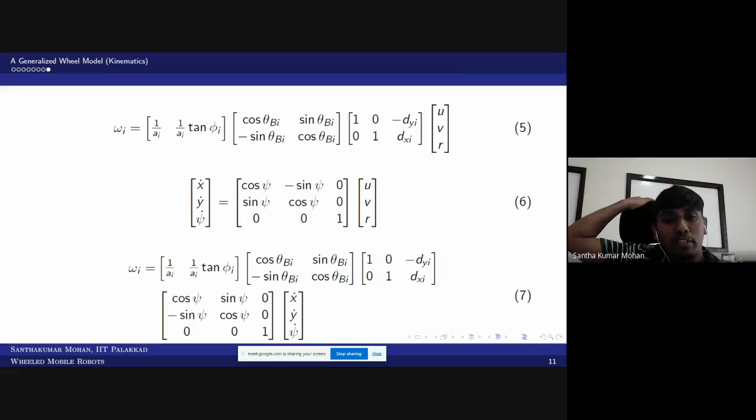So now what you have is a relation between your body-fixed velocity and the angular velocity of the individual wheel, or inertial-fixed, time derivative of generalized coordinate to the individual wheel angular velocity. If you want to go further, based on the wheel configuration you can find omega 1 to omega n, rewrite that on one side, recall this as UVR, and invert it. So now the inverse of that matrix is nothing but W. For that I am taking one such example.

I hope I did not open that file. Okay, so I'm taking such an example.

For example, in this case it is a differential wheel drive. We all know that in a differential wheel drive, the U velocity would be the resultant of the two wheel velocities, v velocity would be 0, and r would be the difference divided by the distance between the two wheels, that we already know. But now we will actually try to find the generalized wheel model basis. So dy1 and dy2, this is the positive direction of dy, so this is d, and this is minus d, you got it. And ci, c1, c2 and b are all in line with y, so in the sense the x coordinate would be 0.

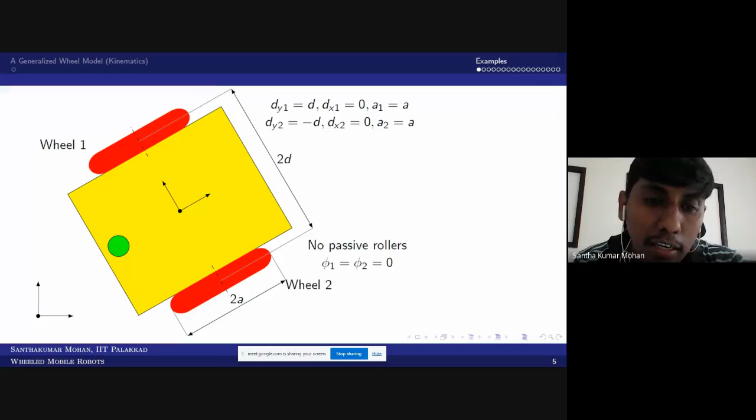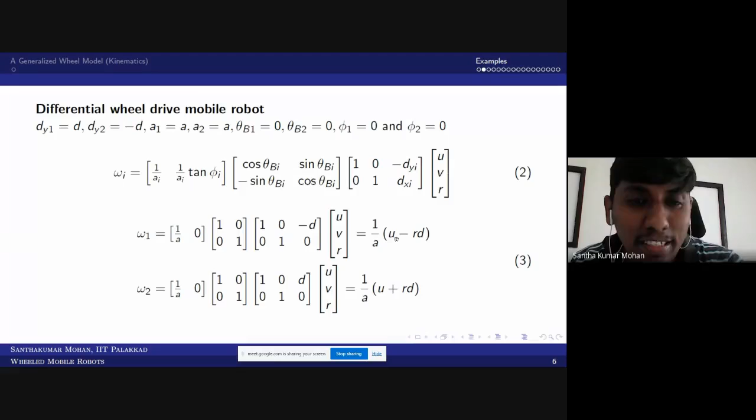And I assume both wheels are the same radius, and there is no passive roller, so phi1 and phi2 are 0. So in that case, this is the overall picture. You calculate omega1 and omega2, that would be in the form of UVR. Since it's a fixed wheel and differential wheel, there would not be any V. So this is what we rephrase it. So now you can write U and R.

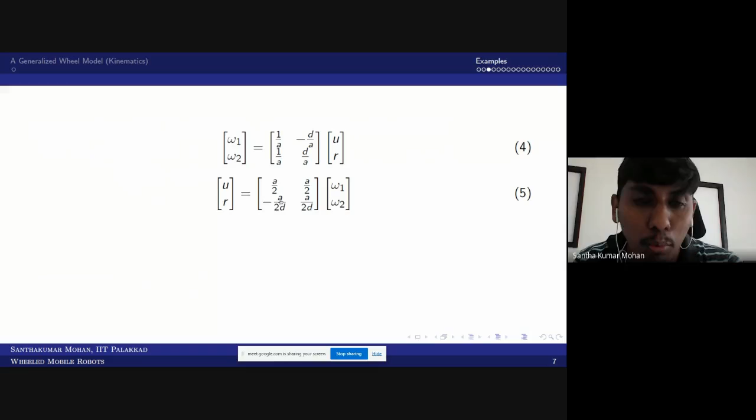And now you invert it, so that is what you call W. But the W is supposed to consist of V velocity also, so this is the W matrix. Similarly, you can extend to n number of examples, you can substitute and get it. So this is the overall picture, even for differential wheel, mecanum wheel, all those things you got it.

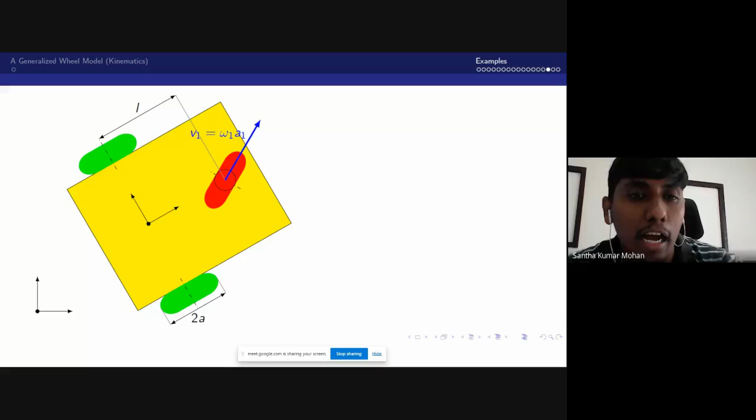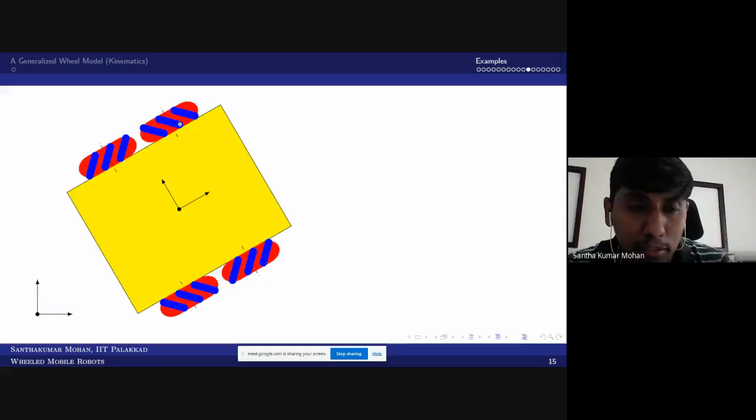So I assume you got it. Now you can see this can be applied to any wheel configuration: independent wheel drive, independent steerable wheel, or tricycle, differential wheel, mecanum wheel, omni wheel, anything you can use it. It need not be at the same angle, 45 degrees minus 45 and all; even any angle will still be addressable. Similarly, it need not be the same distance; even if you move the distance, it's still applicable. So that is the overall idea, the overall picture of this particular slide set.

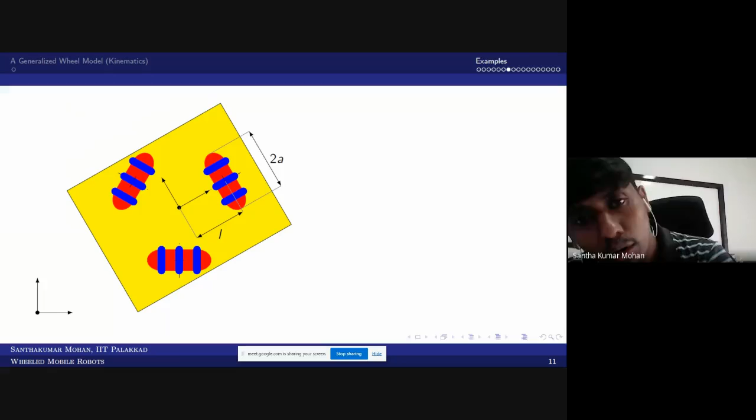I hope now you got some clarity on what is kinematics, what is overall kinematics and all. So in the next session we will attempt what is kinematic control, and how we can talk about one subclass called holonomic and non-holonomic. What is holonomic, and how you can define it with respect to W. All this we will discuss. I open for questions now. Okay, and probably.